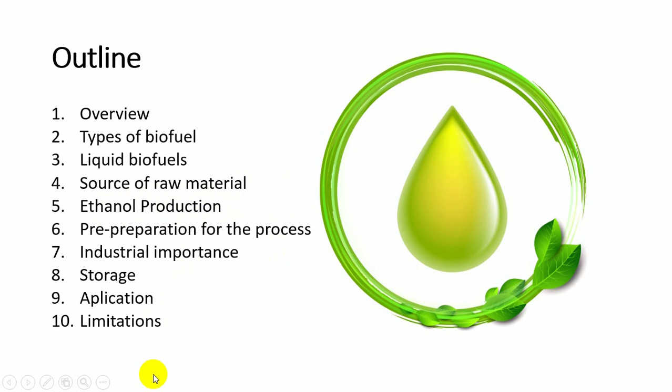Hello everyone, in this video I'm going to talk about biofuels and I will mainly focus on the production technology of bioethanol. Throughout the video I will give you background information about biofuels and then you will get acquainted with types of biofuels. Then I will talk about liquid biofuels and their source of raw materials. As I said, here we will mainly focus on ethanol production, its application, and some limitations. Okay, so let's get started.

Let's ask, what is biofuel? It is any fuel that's derived from biomass. It can be plant, algae, or animal waste. A biofuel is considered to be a source of renewable energy, unlike fossil fuels such as petroleum, coal, and natural gas. Biofuel is commonly advocated as a cost-effective and eco-friendly alternative to petroleum and other fossil fuels, particularly within the context of concern over the contribution made by fossil fuels to global warming.

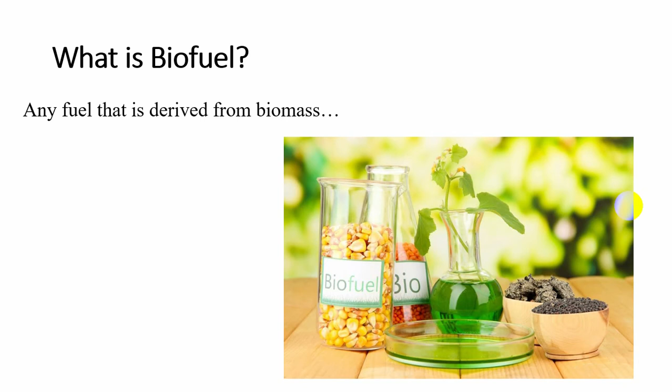We can't make energy, but we can use what exists, like fossil fuel: we can pull that out of the ground, burn it, and convert that chemical energy into mechanical energy to drive a car or fly a plane. Alright, but those energies already exist. Where does our energy come from? As you probably know, most of it, about 85%, comes from fossil fuels. The rest 15% can be divided into renewable energy sources. We get a fair amount from combustibles, and I mean wood. We get some from hydroelectric and a fair amount from nuclear.

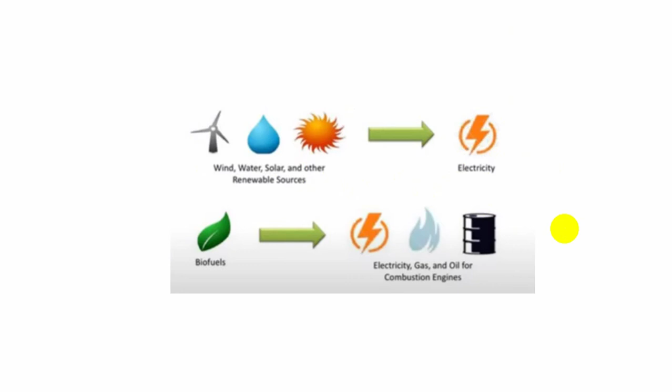But the main difference of biofuels from the other renewables is that the others, such as solar and wind, are used only as electricity. First of all, when we talk about biofuels, we mean molecules that come from recently living organisms. Why recently? Because petroleum and coal are in fact organic materials that have been acted on by geological forces over geological times. But originally they were plants and algae whose biomass was transformed, so when we talk about biofuels, we are talking about biological materials that recently came from living organisms.

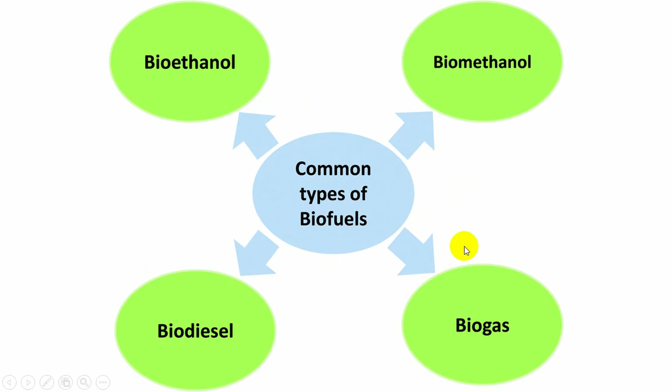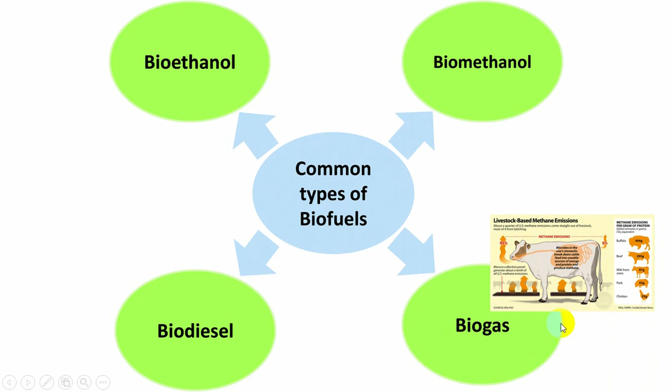And biofuels have been used by humans for millennia. Burning wood and dry dung have been common fuels for a long time. In more modern terms, with biofuels we are talking about bioalcohols, biodiesel, biochar, which is the refuse from agriculture which can be burned to generate energy, and biogas, which here is shown being collected directly as methane. Yeah, we are doing it actually.

When we are talking about biofuels, we have first generation liquid biofuels, which have been around for a number of years, and these are largely ethanol and biodiesel. In both of these cases we are taking plant material. Either plant material that's very rich in sugar, like corn, sugarcane, various kinds of starchy crops, and using that sugar to feed microorganisms that ferment it into ethanol. In the case of biodiesel, plant oils have either already been used as cooking oil and are being reused, or are taken directly from various oil-rich seed crops. So they release fatty acid methyl esters that are then useful as biodiesel.

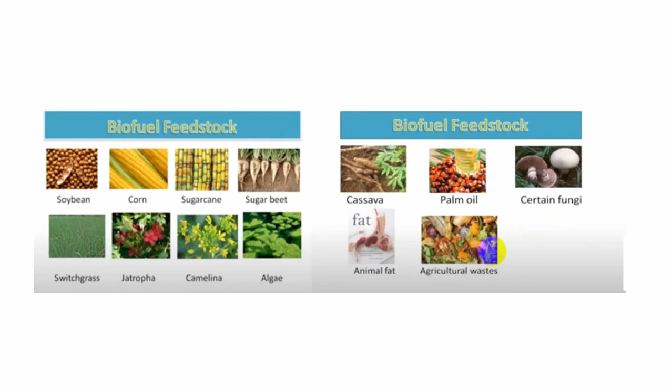Generations of biofuels are divided into 3, sometimes 4, where the fourth is synthetic. First generation biofuels are made from sugar, starch, vegetable oil, or animal fats using conventional technology. The basic feedstock for first generation biofuels is often seed or grain such as wheat, which yields the starch that's fermented into bioethanol, or sunflower seed, which is pressed to yield vegetable oil that can be used in biodiesel.

Second generation biofuel production processes can use a variety of non-food crops. This includes waste biomass, the stalks of wheat, corn, wood, or biomass crops. Second generation or 2G biofuels use biomass to liquid technology, including cellulosic biofuels from non-food crops. Many second generation biofuels are under development, such as biohydrogen, biomethanol, Fischer-Tropsch diesel, biohydrogen diesel, mixed alcohols, and wood diesel.

The third generation feedstocks are crops which require further research and development to become commercially feasible, such as perennial grasses, fast-growing trees, and algae. They are designed exclusively for fuel production and are more commonly referred to as energy crops. Catalysts may be base, acid, or enzyme material. Catalysts are required in biodiesel production to initiate the transesterification reaction and increase solubility to allow the reaction to proceed at a reasonable rate.

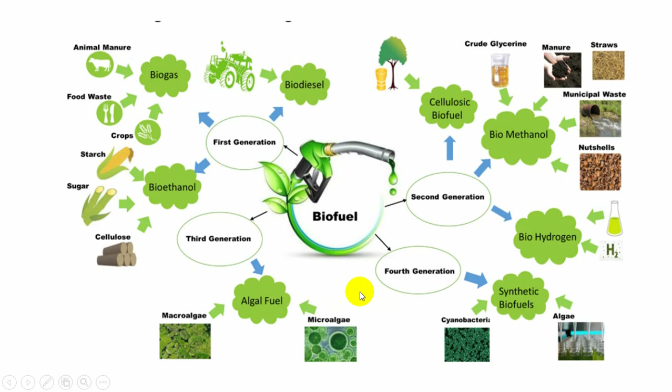In this report, I will stay on bioethanol, which is the most widely used and economically important. Ethanol is the most popular alcoholic biofuel available in the current world market. Henry Ford used the term fuel of the future for ethanol. There are several reasons for its use as an alternative fuel: it's produced from renewable agricultural products like corn, sugar, and molasses rather than non-renewable petroleum products. It is less toxic than other alcoholic fuels, and the byproducts of incomplete oxidation of ethanol are acetic acid and acetaldehyde.

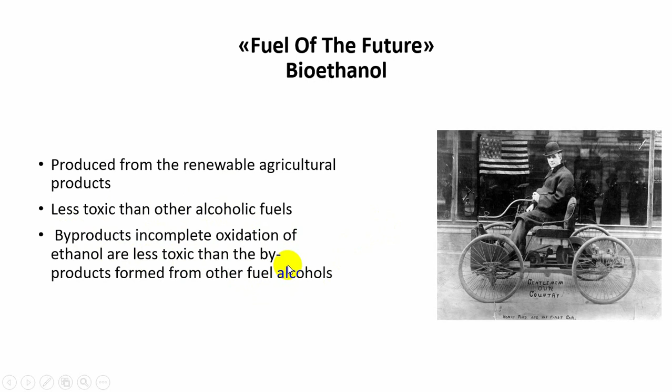In the ethanol, they are less toxic than the byproducts formed from the other alcohols. The feedstock used for fuel ethanol production is mainly sugarcane in tropical areas such as India, Brazil, Colombia, while it is dominantly corn in other areas such as United States, European Union, and China.

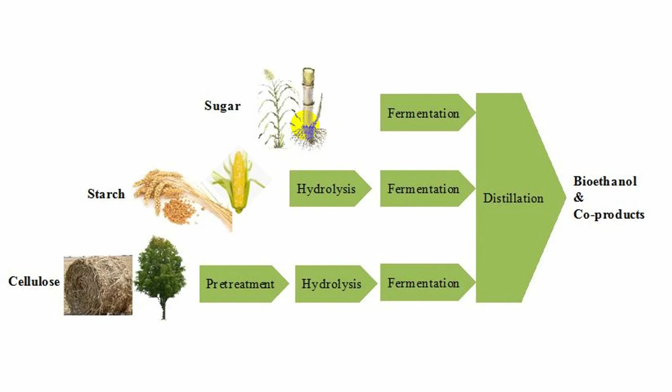Ethanol production from sugar crops such as sugarcane and sugar beet account for 40% of total bioethanol produced and nearly 60% corresponding to starch crops. Due to increasing demand for ethanol in the last few years and due to shortage of molasses and corn, the price of ethanol is increasing day by day.

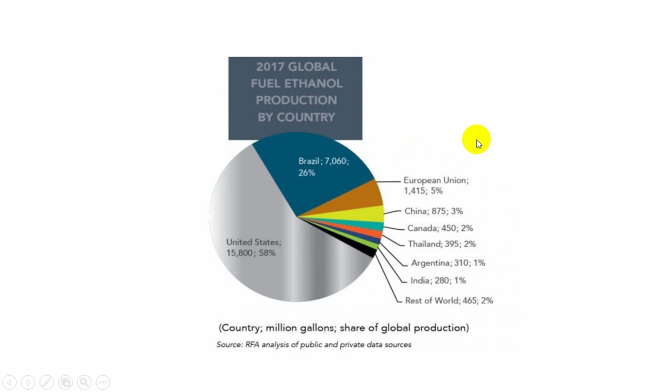Also due to increase in demand as a food source and its rising price, the availability and feasibility of using corn as a feedstock is decreasing. The predominant technology for converting biomass to ethanol is fermentation, followed by distillation. Fermentation is a biochemical conversion process in which biomass is decomposed using microorganisms, for example, bacteria or yeast. This technology can be used for various types of biomass feedstock.

Once the biomass reaches the ethanol plant, it's stored in a warehouse where it's conditioned to prevent early fermentation and bacterial contamination. Through the pretreatment, carbohydrates are extracted or made more accessible for the extraction. During this step, the amount of available sugars depends on biomass and pretreatment used. A large portion of fibers may remain for conversion into simple sugar through hydrolysis reaction or other techniques.

The hydrolysate, yeast, nutrients, and other ingredients are added to the fermenter at the beginning of the batch operation. In the fed batch process, one or more inputs are added as fermentation progresses. Continuous processes in which ingredients are constantly input and product removed from the fermentation vessels are also used. In efficient processes, the cell densities may be made high by recycling or immobilizing the yeast in order to improve their activity and increase the fermentation productivity.

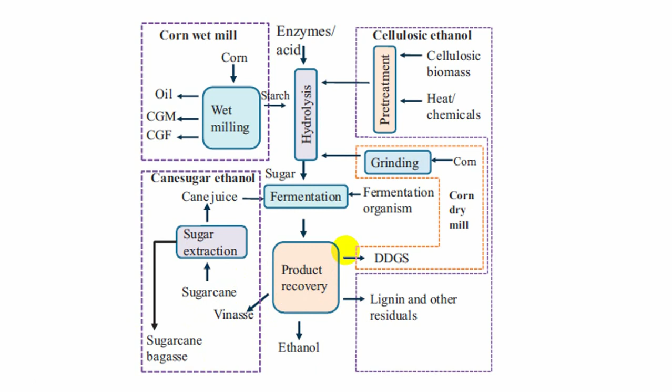The remaining flow from the distillation column, known as vinasse or stillage, can be valorized to produce co-products, which may include process steam and electricity, products for feeding animals, stillage of moderate concentration used as fertilizer, and other valuable byproducts. Here we can talk about two technologies for production.

There are currently no clear commercial or technical advantage between the biochemical and thermochemical pathways. Both sets of technologies remain unproven at the fully commercial scale and under continual development and evaluation, and have significant technical and environmental barriers yet to be overcome.

One key difference between the biochemical and thermochemical routes is that the lignin component is the residue of the enzymatic hydrolysis processes and hence can be used for heat and power generation. In the thermochemical processes it is converted into synthesis gas along with the cellulose and hemicellulose biomass components.

A second major difference is that biochemical routes produce ethanol, whereas the thermochemical routes can also be used to produce a range of longer chain hydrocarbons from the synthesis gas. These include biofuels better suited for aviation and marine purposes.

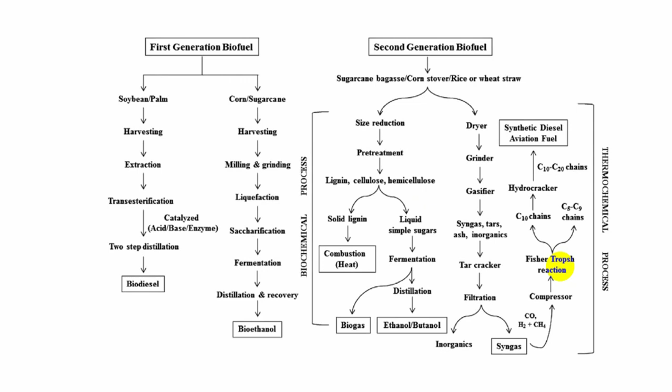Okay, as I already said, ethanol from sugar and starch feedstock is commonly referred to as first-generation biofuel, and ethanol from lignocellulosic biomass is known as second-generation ethanol. In 2019, about 95% of total ethanol is produced from cornstarch in the United States. That's why I decided to talk about biochemical production from corn in this video.

The first step in this conversion process comprises milling or grinding of grain so as to release its starch. Then the material is diluted in water to adjust the amount of sugar in the mash. This is necessary to maintain the yeast and make the mash easier to stir and handle. Then the mixture is cooked to dissolve all water-soluble starch.

The starch is converted to sugar simultaneously. This can be done by enzymes or acid hydrolysis. In the case of acid hydrolysis, dilute mineral acid is added to the grain slurry prior to cooking. The short carbohydrates resulting from these processing steps can be fermented by microorganisms.

For growing of the yeast needed for the fermentation process, the solution must be slightly acid, namely a pH between 4.8 and 5. During fermentation, ethanol is produced, which is diluted with water. This process also results in the formation of carbon dioxide. Through a series of distillation and dehydration steps, the ethanol concentration can be increased.

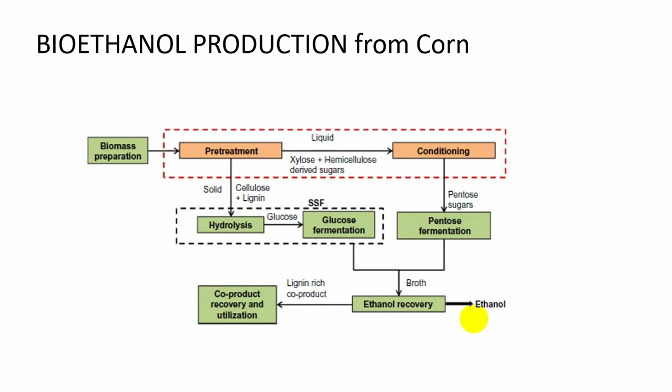For fuel applications, the purity of ethanol must be almost 100%. This means that the water content must be much lower compared to ethanol produced by current industrial technology. For the dehydration of ethanol, several technologies are available, such as use of molecular sieves and membrane separations, which can still be improved. The power and heat production from the non-fermentable fraction of biomass and overall process integration can also be developed further, which will lead to an increase in energetic efficiency and economic performance of the process.

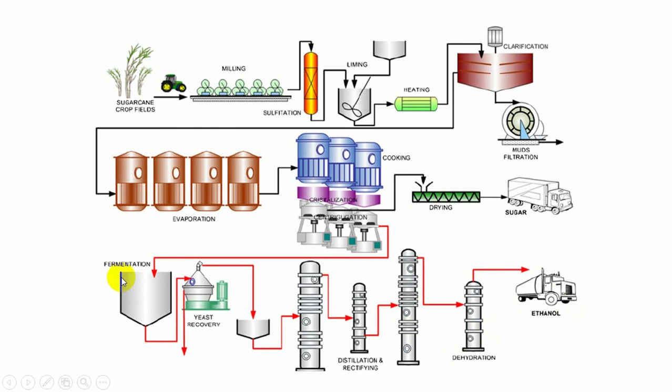For business, though, the primary concern in the switch to ethanol is correct storage. Because ethanol attracts water, tanks become corroded through the exposure to water and the usual rusting processes. However, a second problem occurs because ethanol provides an excellent food for microbes, and when they consume the fuel, they produce acetic acid that vaporizes and corrodes parts both above and below the fuel line.

Experience shows that the corrosion above the fuel line in tanks storing ethanol blends is likely to be even worse damage, potentially posing serious environmental and safety risks, as well as to the bottom line through fuel loss. Actually, pure ethanol has a flash point of 13 degrees Celsius. It releases vapor into the atmosphere, creating a flammable environment. Temperature-controlled chemical storage buildings will prevent excess evaporation.

And when we talk about maintaining fuel integrity, we can say that anyone storing significant amounts of biofuel will be affected by phase separation, as well as ensuring your tank and fittings are appropriate for keeping your fuel fresh and avoiding reactions. A fuel treatment is a good option. And when we talk about watching for water damage, following on from that, checking tanks for water at least once a month should be done.

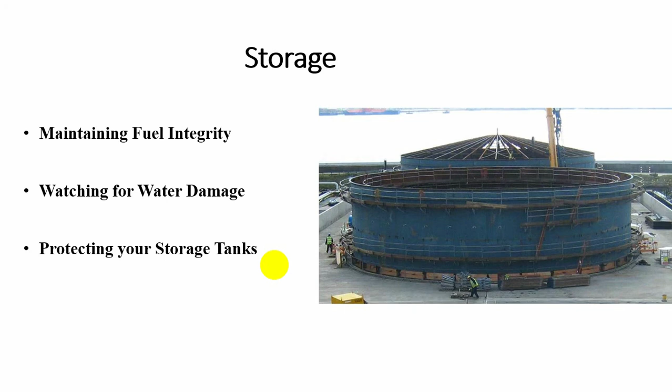If we want to protect our storage tank, it is essential to check the fuel storage tank regularly for the telltale signs of corrosion resulting either from high water content or the presence of microbes producing acid vapors. We can also treat our tank with an anti-corrosion treatment for boundary protection. We should try to avoid using the same tank for different types of fuel because it increases the chance for cross-contamination from different microbial varieties. I think it's enough for the storage part.

Let's talk a little bit about applications of ethanol. You probably know that ethanol can be used as a transport fuel to replace gasoline, as a fuel for power generation by thermal combustion, and as a fuel for fuel cells by electrochemical reaction. Ethanol is best used in spark ignition engines because of its high octane rating. Due to its poor ignition quality, low cetane number, it is less suitable for diesel engines.

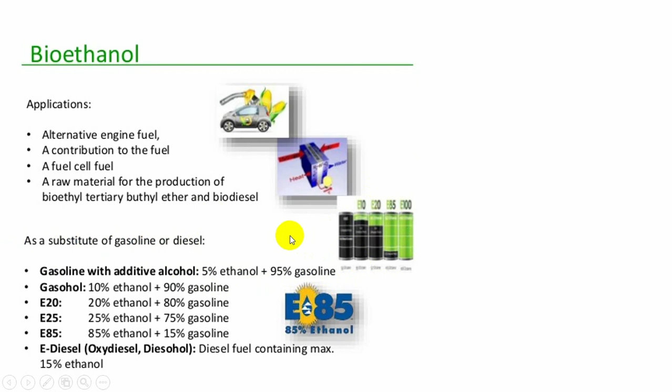It is generally impractical to use neat ethanol in spark ignition engines due to its low vapor pressure and high latent heat of vaporization, which make cold start problematic. The most cost-effective aid is blending ethanol with a small proportion of volatile fuels such as gasoline. Various mixtures of bioethanol with gasoline or diesel fuels have been used. The most well-known blends are here. I would like to show this, especially E85. It's the most famous one.

Okay, and after that I would like to talk a little bit about the limitations part. Some of the disadvantages of biofuels apply mainly to low diverse biofuel sources such as corn, soybeans, sugarcane, oil palms, which are traditional agriculture crops. Both of these kinds of fuels, ethanol or biodiesel, we know how to make, the technology is available, but there are problems associated with them.

And one of the big problems is that they are our food crops. So first of all, if we are going to use this material to make these fuels, that means that the land they are growing on is not going to be used for food. Now, the water being used to water these crops is not going to be used for food. So we are taking land, we are taking water out of the food supply.